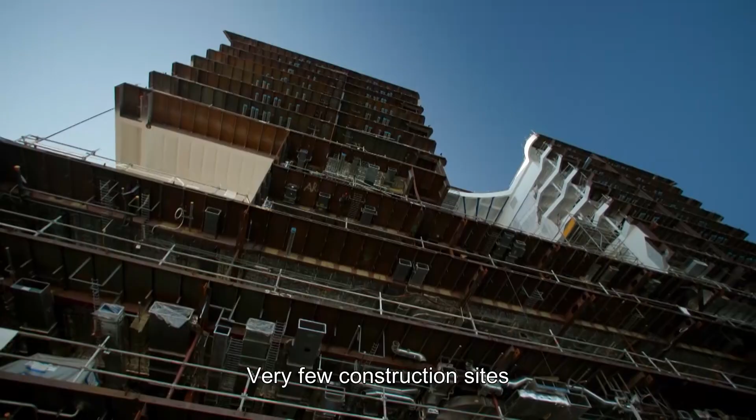The giant vessels that come out of here are the result of incredible human and technological adventures. To bring them to life, the historical expertise of these shipyards are at the service of rigorous organization.

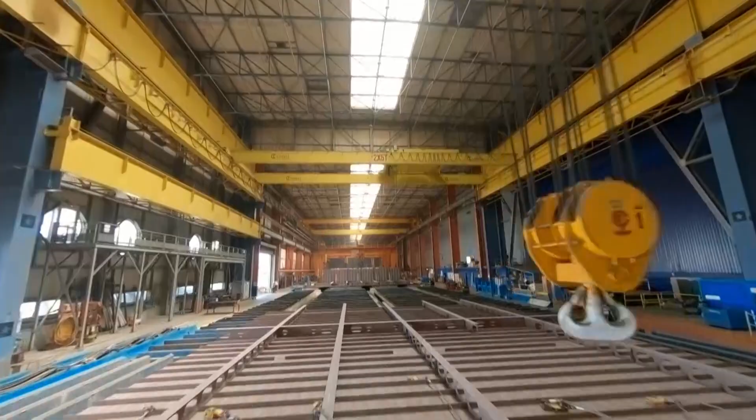Hundreds of thousands of steel parts are cut up every year before being taken in charge by a series of exceptional tools. Oversized workshops where welders and carpenters create complex structures of several tens of feet.

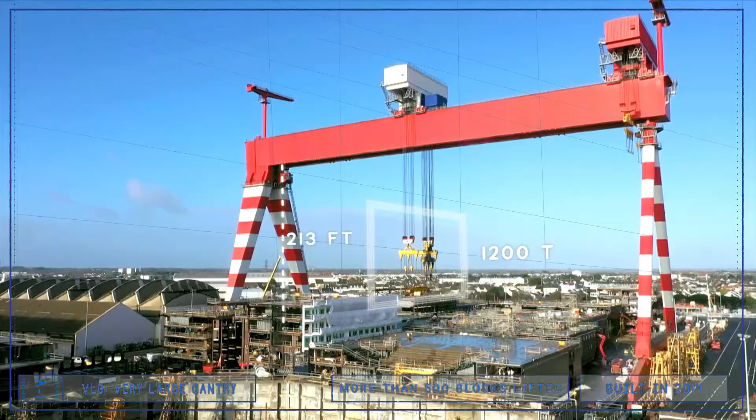On the assembling area, which is over half a mile long, the very large gantry can lift actual buildings weighing over 1,000 tons and assemble them with extreme precision in a monumental dock.

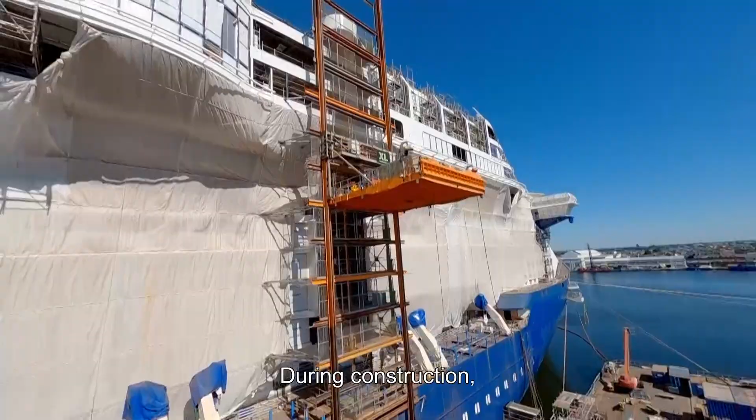On every one of their liners, the Chantiers de l'Atlantique bring together skills from all horizons within an extraordinary site.

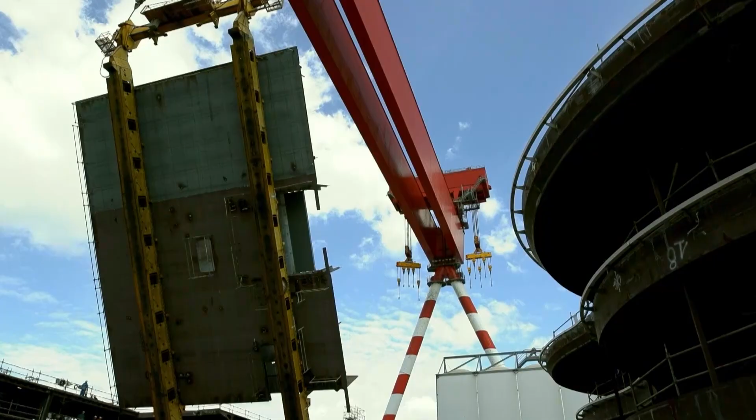How do they design such complex ships? How do they organize their construction in record timing? How do they imagine ever more efficient tools? And how do they carry out several of these colossal work sites at once? Halfway between the land and the sea, thousands of people unite strength for one goal: to perfectly build genuine floating cities.

For 150 years, the liners from Saint Nazaire have made a mark on the history of navigation. Facing the Atlantic Ocean and the mouth of France's longest river, the development of a sizable naval industry imposed itself self-evidently.

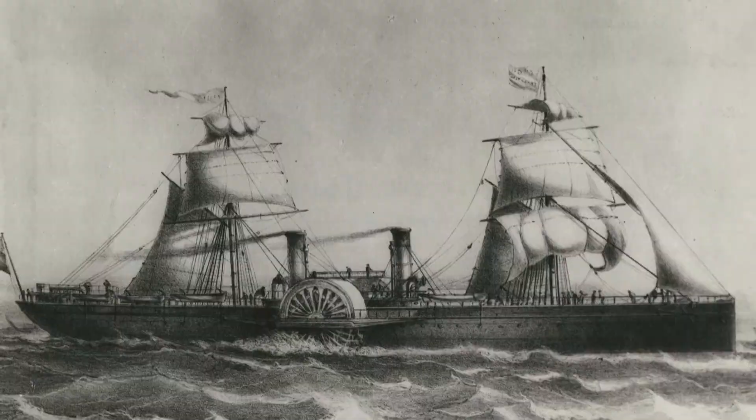As early as 1864, the first French transatlantic steamer came out of these shipyards. In 1935, it was the Normandie, the biggest liner of the time and the start of a long history with gigantism. In 1960, the legendary France saw the day. The productions of those now known as the Chantiers de l'Atlantique continue to fascinate the world.

Today, this is one of the rare cutting-edge industries capable of producing such giants of the sea. No fewer than 980 feet long and 200 feet high. These cruise ships are as massive as they are complex.

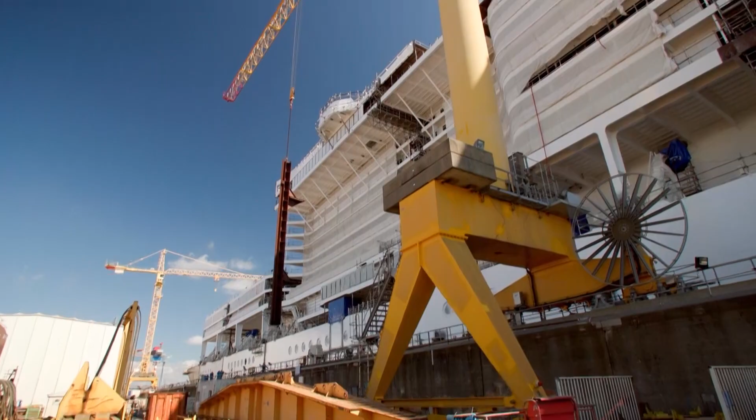To manage such an exploit, all the more impressive infrastructure and tools are scattered over this exceptional site. An oversized manufacturing line spreading over 370 acres is capable of building 3 of the biggest ships in the world simultaneously.

In the main construction area, the structure of the Italian MSC World Europa is being assembled. On the water, on the Quai Penhoët, the Greek celebrity Beyond is having her 2,000 cabins installed. And in Basin C, finishing touches are brought to the gigantic wonder of the seas. In a few months, she will become the biggest cruise ship in the world.

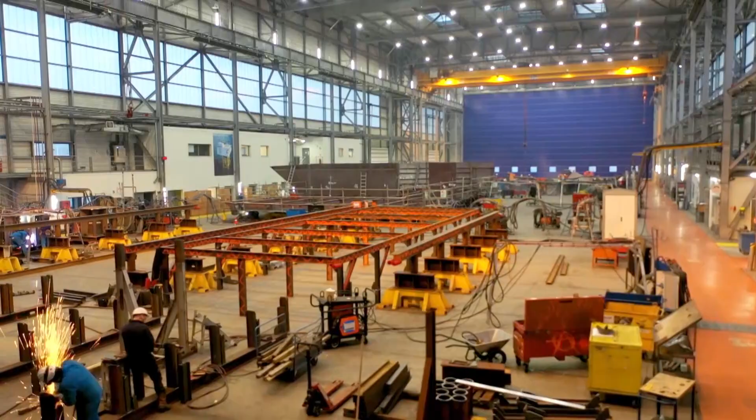Each of these ships is a long-term endeavor. Naval architects plan every tiniest detail. Nothing is left to chance. After over a year of studies comes a journey lasting 24 months through the monumental workshops. More than their conception, it's the way they are built that is important. Genuine expertise, both human and technological.

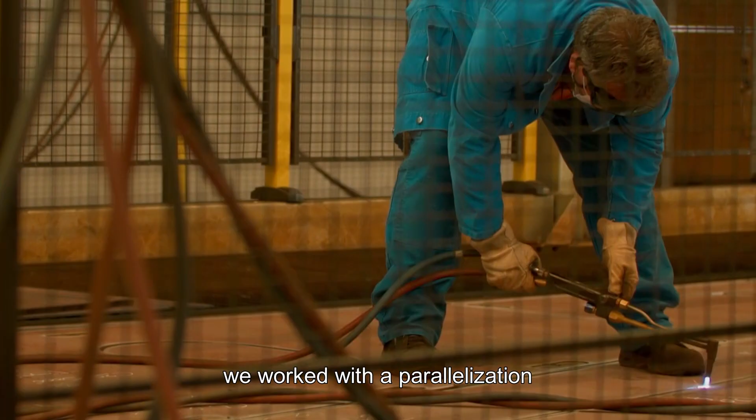Each of the ships conceived here will follow an extremely precise course. Every task is programmed. The elements of the different ships cross each other and are produced at a rigorous and frenzied pace. The real starting point of these extraordinary liners is the sheet metal cutting workshop.

Every year, no fewer than 370 miles of metal are cut up, shaped, and assembled, the equivalent to the distance between Paris and Bordeaux. This huge quantity of steel is first brought and stored as plates in the vast sheet metal sector.

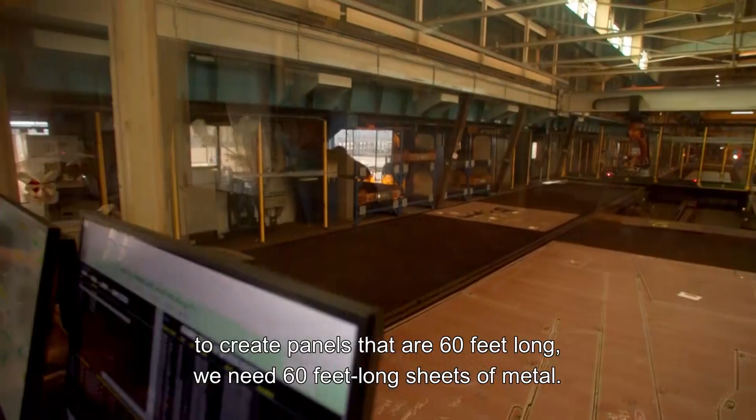Conveyor belts move the sheets up to the cutting tools. No fewer than 400,000 parts of different shapes and sizes are necessary to create the structure of a single ship.

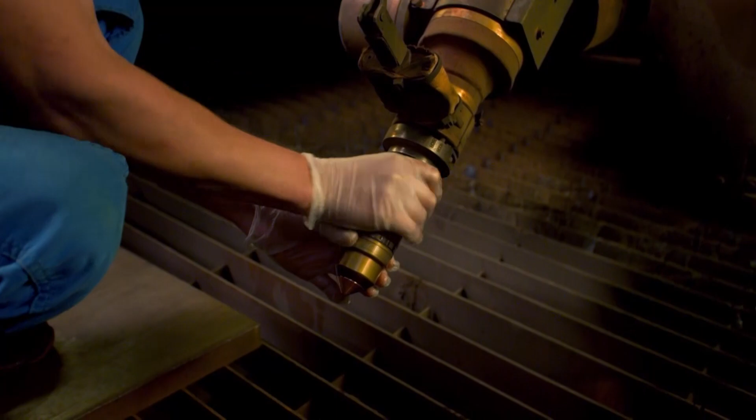The operators check the outlines before they go into the plasma cutting machine. Inside these cutting chambers, the jet of the torch can reach 32,000 degrees Fahrenheit, enough to make steel melt in a flash with a precision down to less than half an inch.

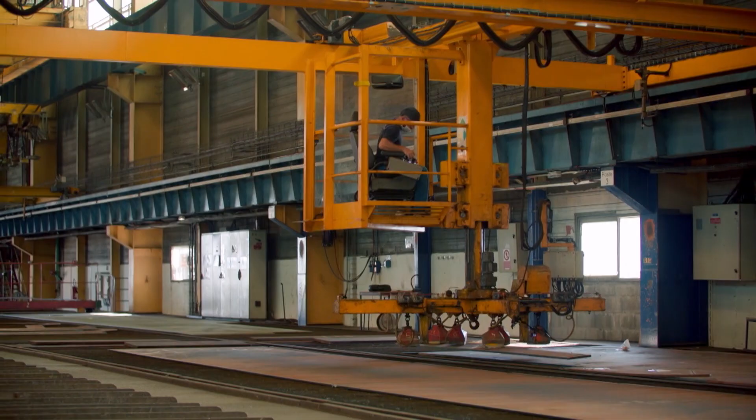No errors allowed. These first cuttings condition the rest of the construction. The different parts must slot in perfectly. Once they've been finely chiseled, each part is then separated from the others by a robot equipped with powerful magnets. They are sorted and arranged into categories before being taken to the first assembling workshops.

The journey continues a few dozen yards away in a huge flat panel workshop, a real manufacturing line where every part is unique. The goal here is to assemble the first elements of construction, panels that will make up the structure of the ships. Their production sets the pace for the rest of the operations.

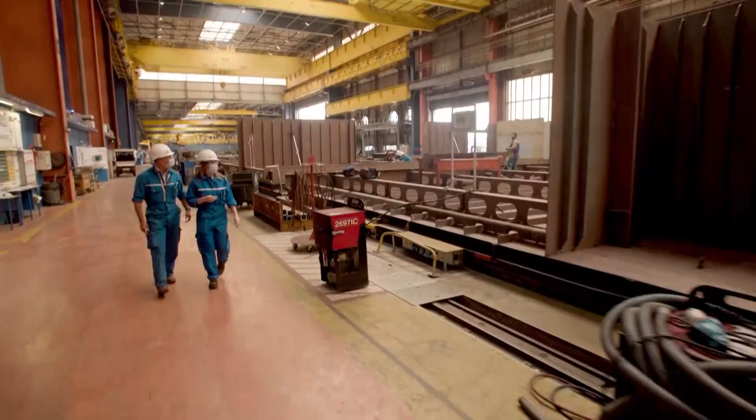Gradually, along the line, more elaborate elements emerge. Three-dimensional parts in which we can make out the first doors and future corridors of the ship.

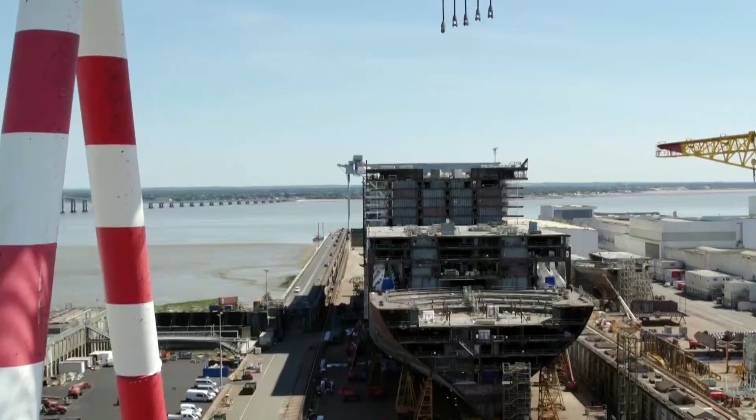Currently, the foundations of the MSC World Europa are being assembled. Her code name is W34. The structure is being elaborated in the construction dock, and the workshops must produce uninterruptedly so as to continue the works. A crucial phase has begun on this manufacturing line, pre-outfitting.

This is when they prepare the installation of the functional elements of the ship to facilitate operations on board later on.

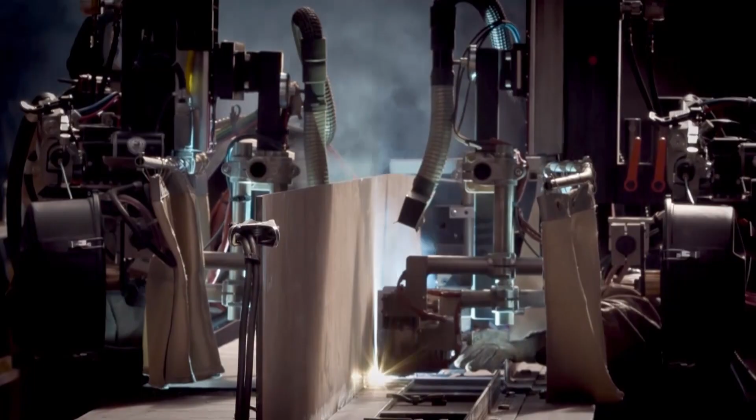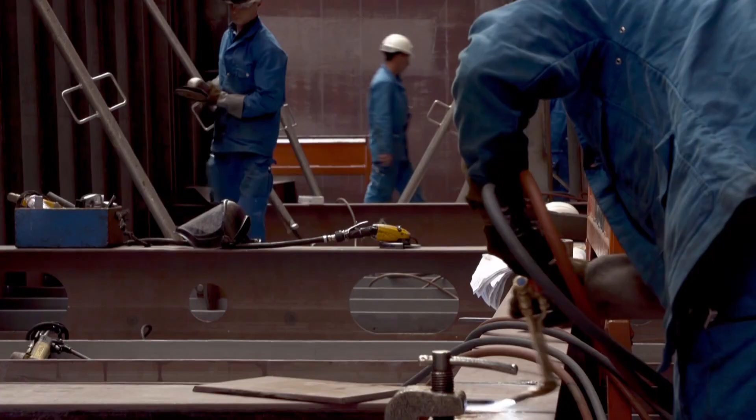The first passages of cables or pipes are pierced now, opening the way to new trades in the manufacturing line. This early introduction of a maximum of elements is absolutely necessary, one of the keys to the efficiency of the shipyard. At this stage, construction teams work on the ground in a controlled environment. The panels are turned over, making it easier to pierce, weld, and generally work on the entire structure.

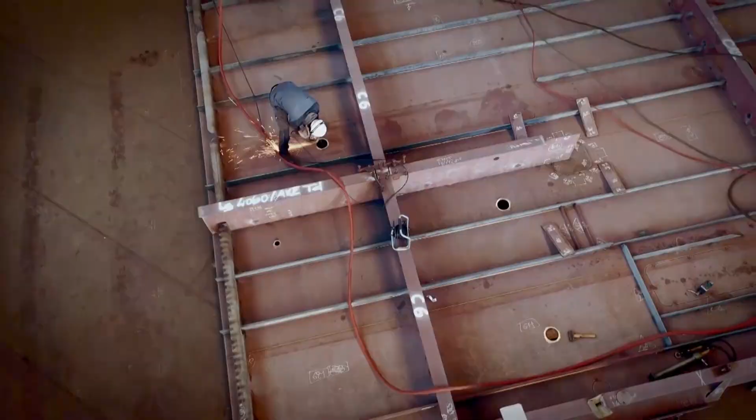When they leave the workshop, each of these panels will weigh 450 tons and will have required 1,500 hours of labor. No fewer than 700 pieces are necessary to create the structure of a single ship.

A few miles away from these steel workshops, an entirely different site is also working at full capacity. The shipyards are equipped with a real factory entirely dedicated to producing cabins, a key element in the construction of cruise liners, which must be mastered from A to Z.

160,000 square yards of production lines, stocks, and workshops. Thanks to this infrastructure, the shipyards can ensure the continuous production of the cabins that will compose their ships. In total, more than 5,000 pieces come out of here every year.

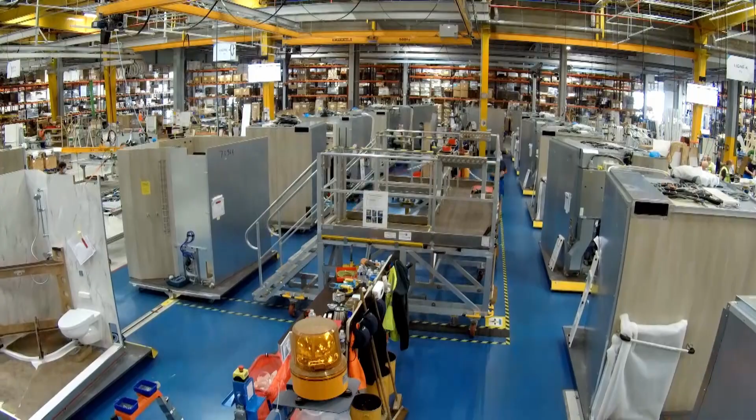For the time being, it's the L-34, the Celebrity Beyond, which is in boarding phase. The structure of the ship was completed 6 months ago, and since then, no fewer than 2,000 cabins must be fitted on board. In the production factory, the pace must not slow down. Everything must go like clockwork to keep up the rhythm.

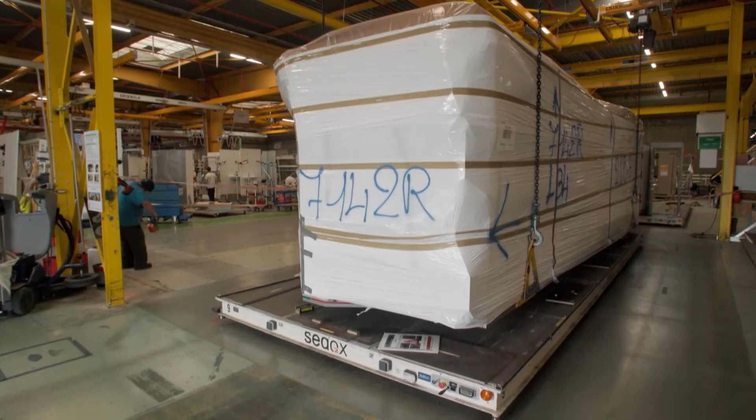The factory only has 6 months to produce the 2,000 to 3,000 cabins of a single ship before moving on to the next one. Back on the main construction site, new parts of the W-34 are constructed, the ship whose structure is only just being erected.

To supply the worksite continuously, particularly sophisticated elements see the day in this gigantic hall, the 180-ton workshop. 120 specialized workers build complex structures designed to form the hull and hold of the ship, parts of several dozen feet hugging precise curves. They must work the sheet metal as finely as possible while avoiding deforming them and maintaining rock-solid sturdiness.

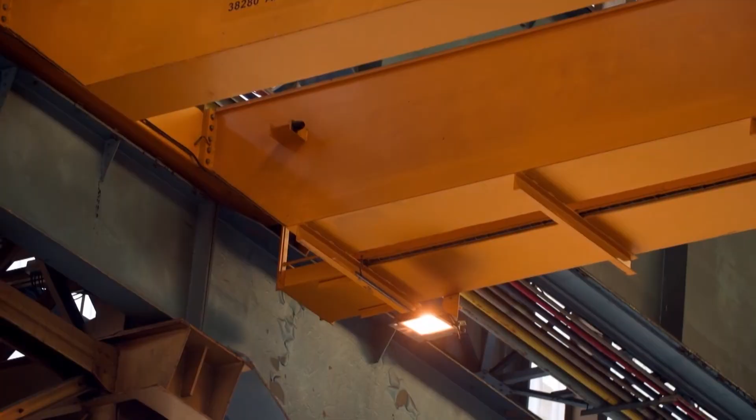To handle these massive elements with the greatest care, 2 lifting decks tower over this vast hall. Their strength gave its name to the workshop. They can hoist parts weighing up to 180 tons. Once in place, the complex panels will be shaped, straightened, and welded perfectly thanks to the skills of the exceptional builders. Each of the elements that leave this workshop requires approximately 10,000 hours of work.

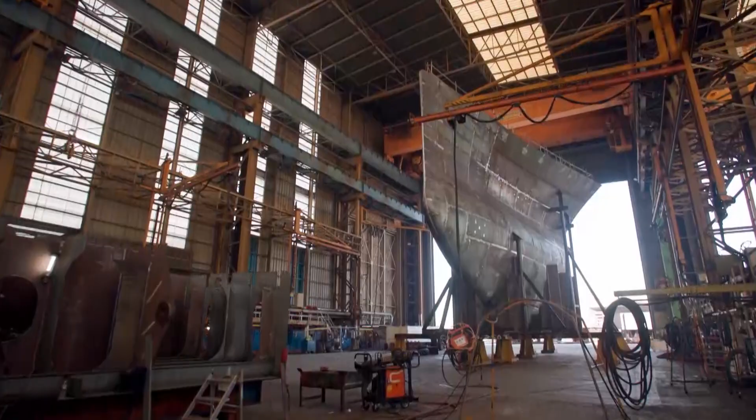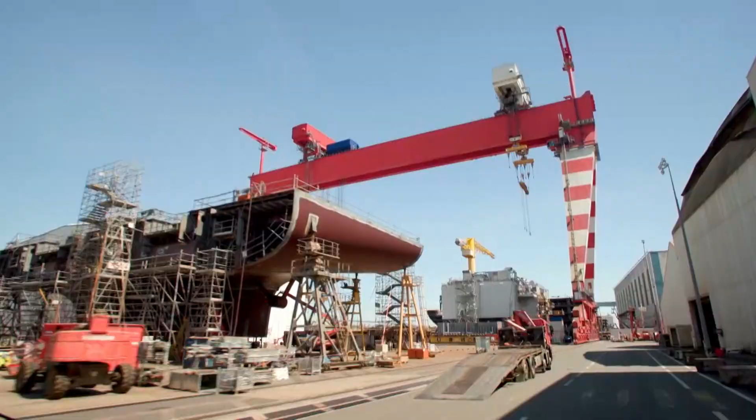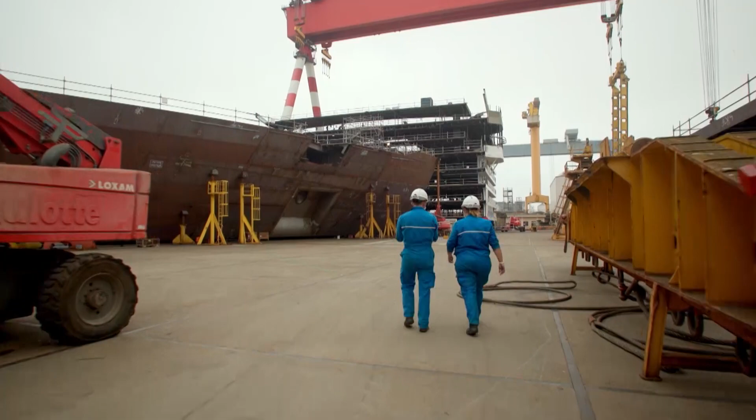These blocks constitute the base unit in the construction of these liners. About 60 of them are needed, of all shapes, to compose an entire ship. Their common point, their size and mass.

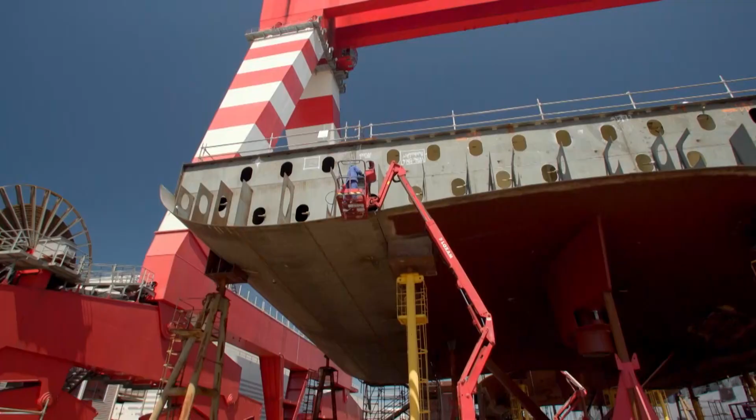Each of these blocks will be moved thanks to the huge gantry crane that towers over the area. But before being integrated to the ship's structure, they will add a maximum of elements while the works are carried out on land.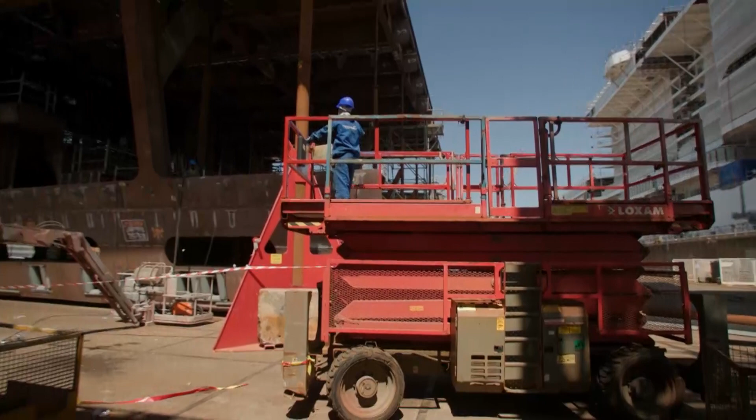The assembly of the W-34 World Europa is halfway completed. Half of the structure is in place in the construction dock that is alongside the pre-assembling area. 35,000 tons of steel that outline the first curves of the ship.

Production and layout of the blocks are in full swing. In turn, they will be grasped by the VLG, the very large gantry. Each one of them must be ready on time, for the clock is ticking. In 3 months' time, the ship's frame must be completed to make way for the next boat.

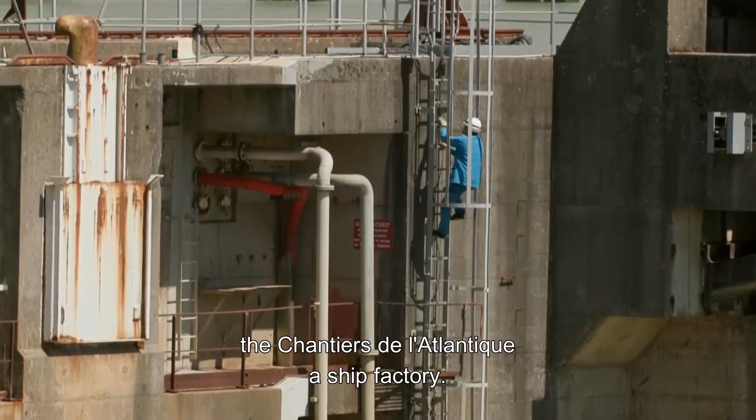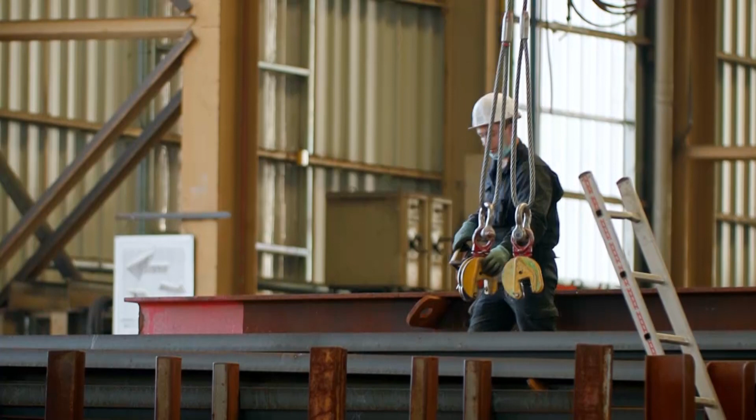In return, this organization requires a thorough preparation and conception of each element. For ultimately, all these blocks must be assembled perfectly. To do so, the most detailed studies possible are crucial.

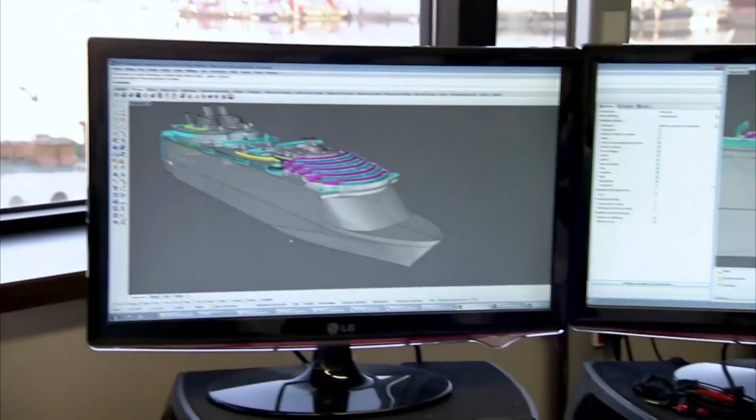To meet the deadlines, construction must start while the design task isn't entirely completed. The studies continue until the last block is positioned.

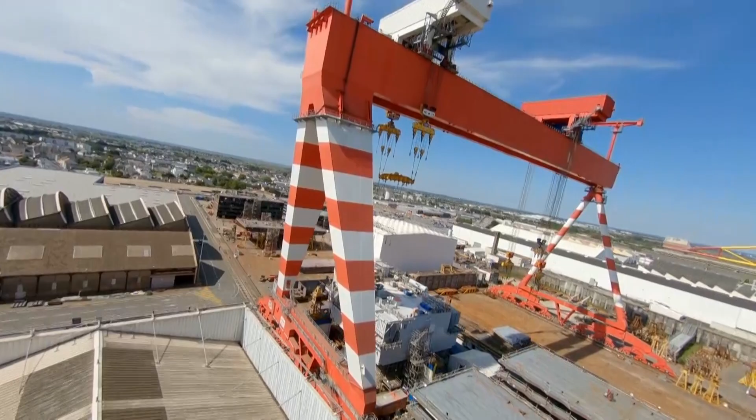The studies make constant progress, while the giants of the seas come to life on the shipyard. On the pre-assembling area, the huge red and white gantry moves along. This is the most powerful one in Europe. Towering over the area at 210 feet high, it can lift elements weighing more than 1,200 tons. It moves along the rails constantly, striding over all the pre-assembling area and the construction slip.

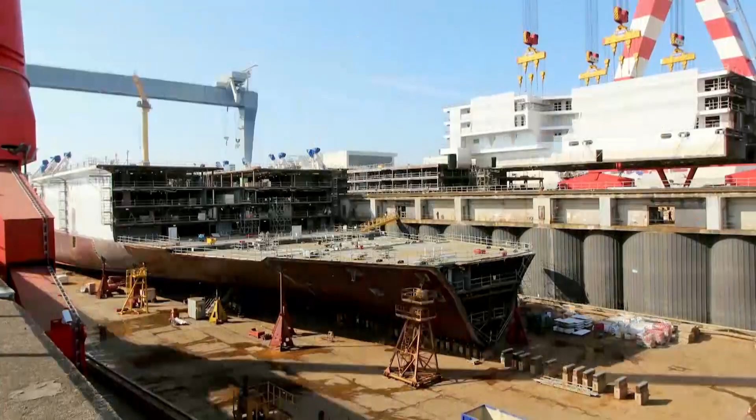It handles blocks one by one on the one side to place them on the other and create the future ship. It sets the tempo for the entire shipyard. This is a real metronome.

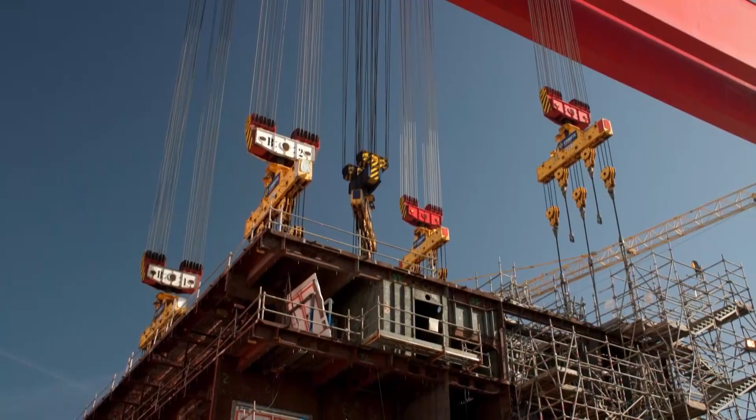Time for Block 525 to come on board. The gantry is positioned above it, and the operators place the lanyards at the top of the structure. In total, 4 lifting hooks are positioned on the corners of the block. A technique that gives the VLG all its power, but that requires impressive precision.

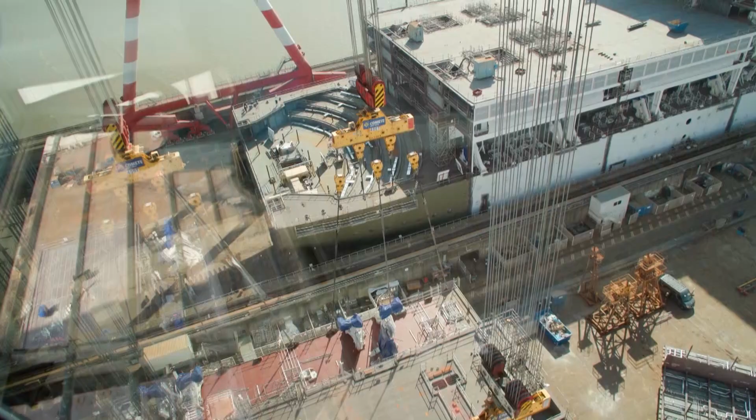Although this operation is carried out every day, it remains a sensitive one. From his cabin, the gantry operator works with extreme precision despite the oversized parts he transports. Once above the ship, his task is far from being completed. The block must come to fit in perfectly with the other elements that are already positioned.

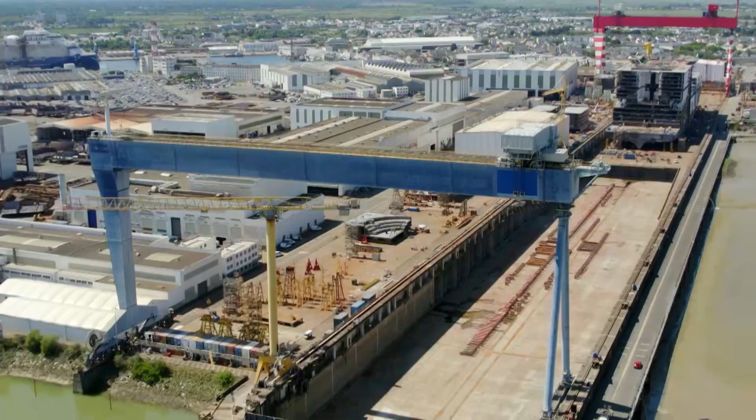Since the beginning of the construction, 30 or so blocks have been assembled. In the end, 58 different blocks will be created, equipped, and assembled to form the W-34. Another 3 months of work in the dock will be necessary to achieve the complete structure. But before continuing the assembly, a particularly sensitive operation must be undertaken.

The rhythm set on all work sites must not slow down. The pace is high, and the pieces of the next ship planned in the schedule are already elaborated in the workshops. Some are even being assembled into blocks. The W-34 will have to give way in the construction area.

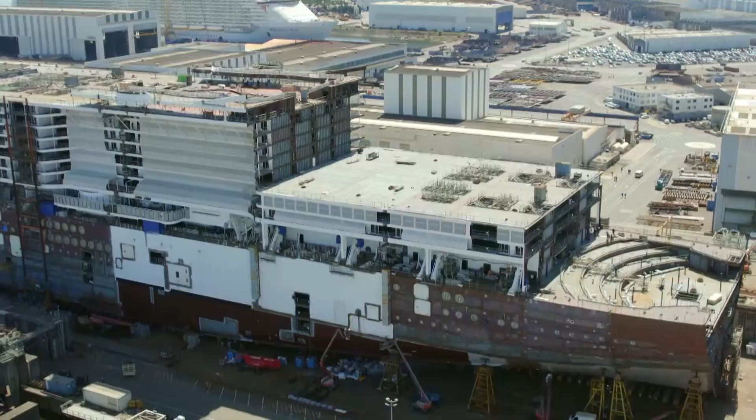This construction area spreads over about 1 mile. It is made up of 2 parts. To the north are the assembly posts in the high dock. This is where the W-34 took shape. On the other side, on the border of the Loire, the second part is called the deep dock. This area of 1,100 feet long by 220 feet wide has a 36-foot elevation gain.

The W-34 will have to move along from the high part towards the low part to leave some room behind her. Managing these construction spaces over time is crucial for the shipyard.

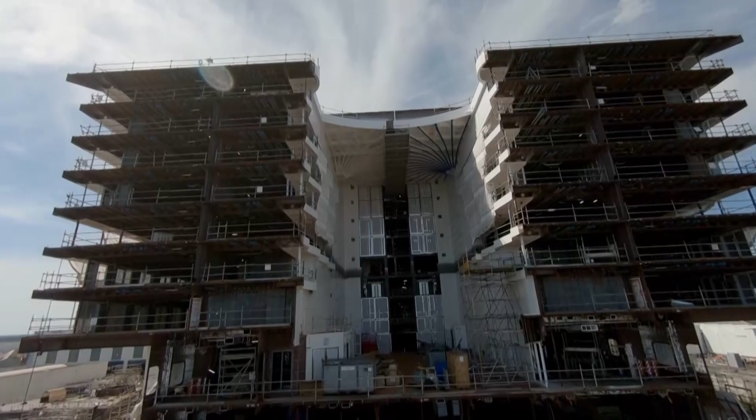At this stage of construction, although the W-34 is incomplete, it can now float. This is in fact the only way of moving such a colossus. To move 35,000 tons of steel, more than 3 times the weight of the Eiffel Tower, buoyancy is of huge help. The entire construction area will be filled with water. The sluice gates open and the Loire fills the area.

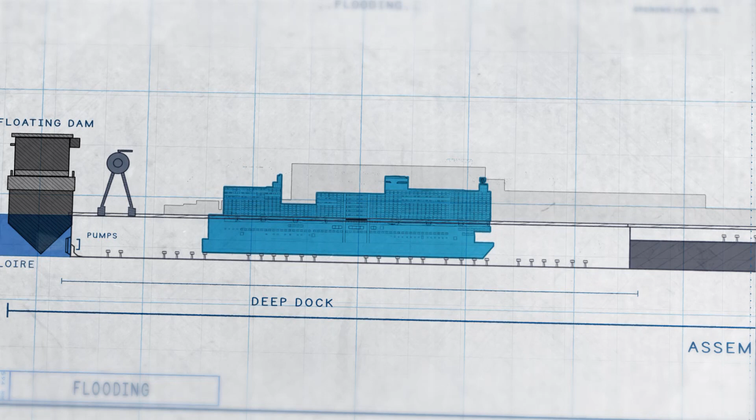The ship is then guided along the docks thanks to a powerful winch. Once in position, pumps empty the dock. The water level goes down and the ship takes its position on new supports. On the other side, the coast is clear for a new construction. Eventually, this deep part can be filled with water to let the W-34 out without disrupting the rest of the shipyard.

Other than making room and getting closer to the Loire before being launched, the W-34 will also be lower down than before. This will allow to build the ship's highest decks. If, in principle, all this handling is simple, carrying it out remains highly complex. There's no room for error here.

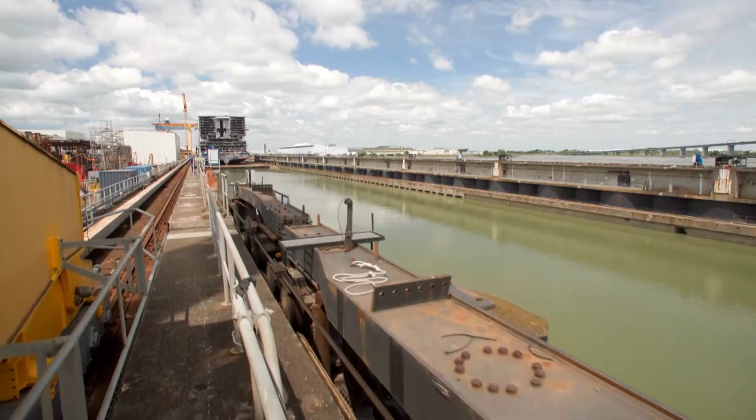Works are at a complete standstill. Everybody has cleared the dock and the water of the Loire starts to seep into the construction dock. After 6 hours of continuous flow in the deep part, the water now reaches the high part. They will have to wait another 10 hours or so for the ship to lift off its supports.

Night is beginning to fall. At 10 p.m., the water touches the hull for the first time, a crucial moment in the ship's construction. The teams must check the hull's water tightness down to the smallest detail.

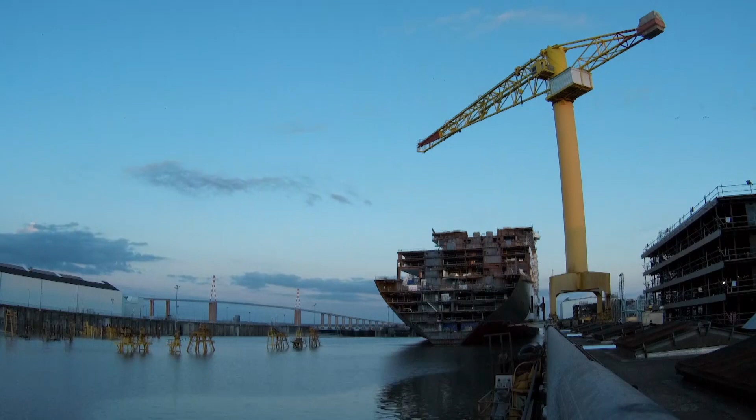Engineers, workmen, and technicians delve into the titanic metal skeleton, looking out for any leaks.

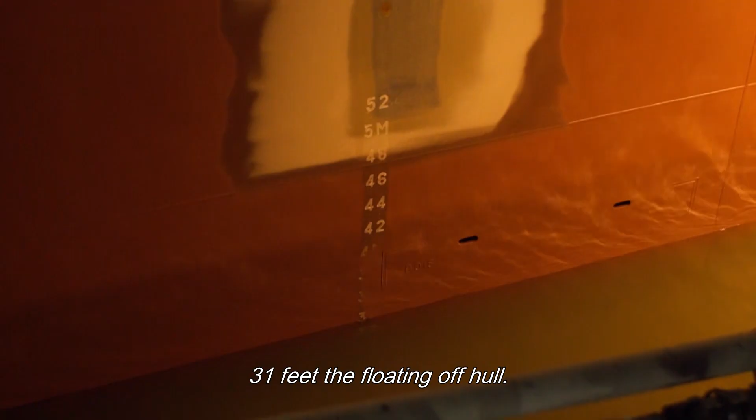Meanwhile, on the outside, they are checking the draft. The ship must go into the water deep enough to ensure its stability and allow for maneuvers.

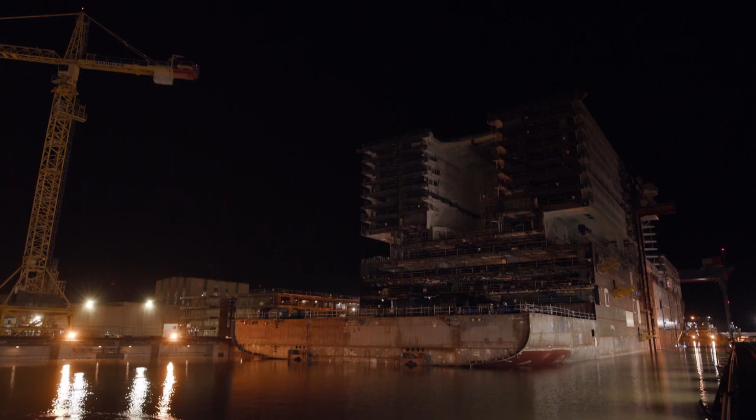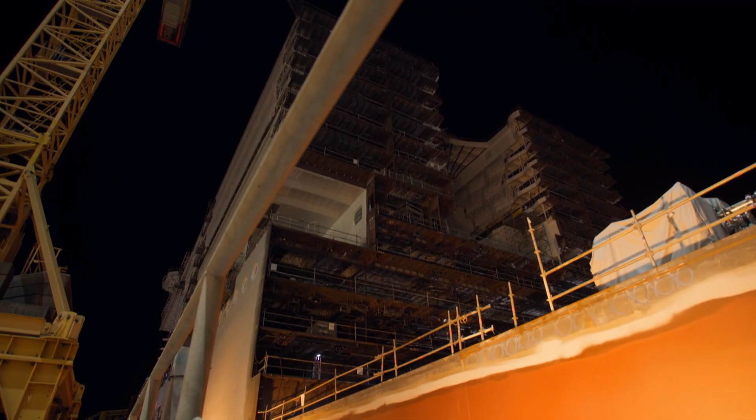The super powerful winch is activated. Everybody holds their breath. In the middle of the night, the steel giant glides silently over a few hundred yards. Ok, on démarre. The team keeps an eye out until she reaches the other end of the dock.

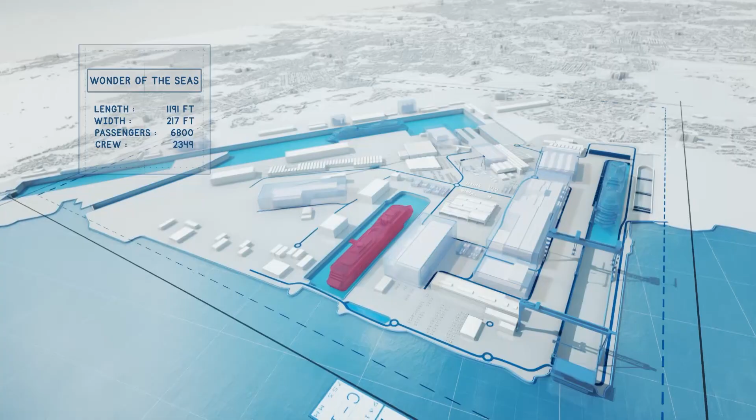The W-34 is in position. In the early hours, the water must be partly emptied for one last maneuver to be performed. While the construction of the W-34 is at a standstill, the last tasks are carried out on the other side of the shipyard. In Basin C, the Wonder of the Seas, also known as C-34, is a few months away from delivery. 1,200 feet long, 220 feet wide, and 230 feet high. Once completed, it will become the biggest ship in the world.

Almost a year ago, this giant left the construction area to join the area dedicated to the outfitting of ships. Since then, teams have been working relentlessly on board. They have been setting up all the ship's equipment, a new phase in the construction of these giants of the seas that calls out to new skills.

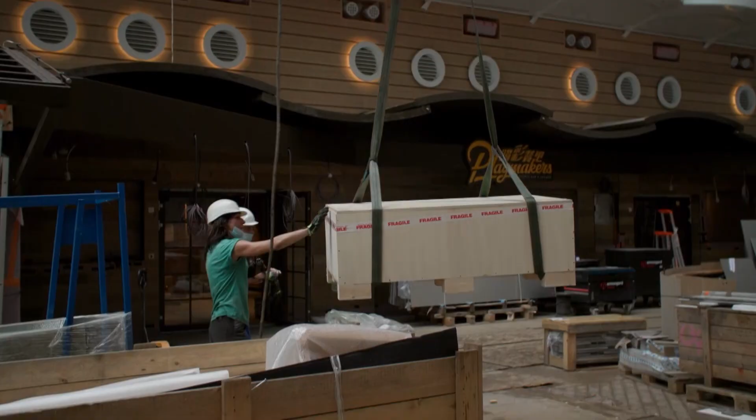The works range from the more functional to the more decorative. This capacity to unite as many trades, to make them work together and in the same direction, is one of the specialties of the Chantiers de l'Atlantique. Once again, preparation and organization are the keys to success.

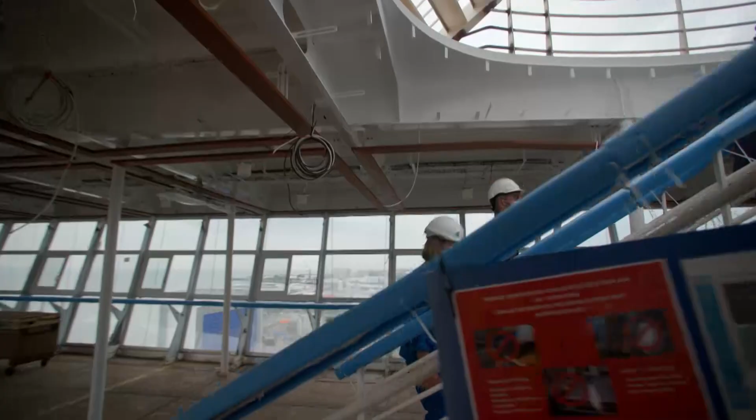Alongside these questions of layout, the first functional elements are going to be tested because a crucial step is coming soon: trials at sea. This will take place in 3 weeks' time, and the ship must be ready to sail for the first time. Back in the construction area, the W-34 hasn't quite finished its movement.

The ship's structure is in position in the deep part. Part of the dock has been emptied, but one last maneuver remains to be undertaken. The 35,000-ton carcass must shift a few yards to change axis.

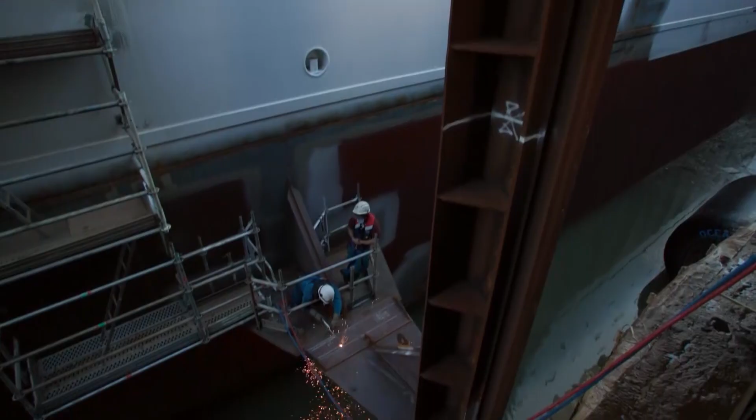To manage to bring the ship closer, the huge struts that helped guide it from one part of the dock to the other must be removed first. These steel parts of tens of tons are carefully cut up before being taken away by the mobile crane.

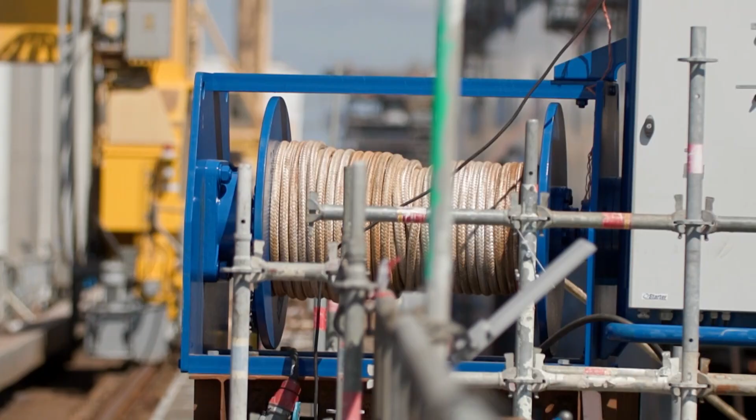At the same time, the future liner has been connected to powerful winches. 8 in total that will allow to move the structure in every direction. They are coordinated to pull or release in turn, thus guiding the ship with a precision down to an inch.

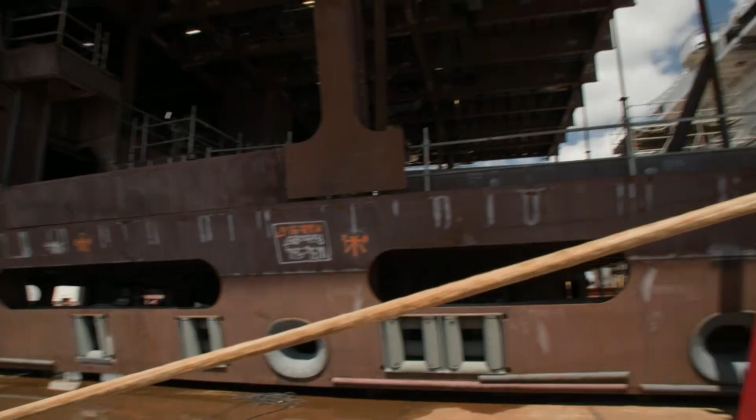The handling cannot just proceed approximately. The ship must be positioned vertically on the supports already positioned at the bottom of the dock. When the water will be emptied, it must stand on them precisely. The slightest shift could make the entire structure topple.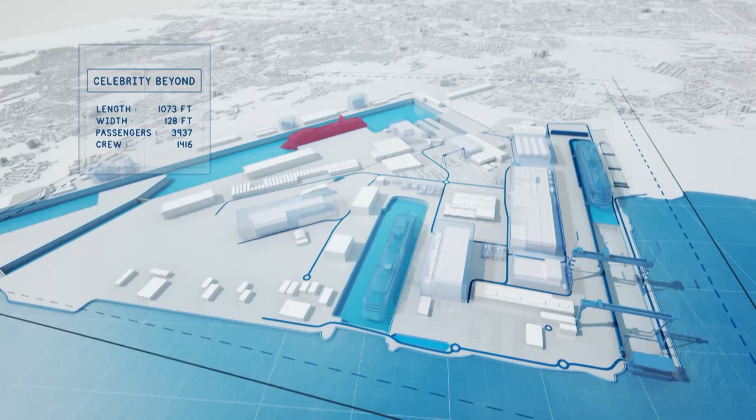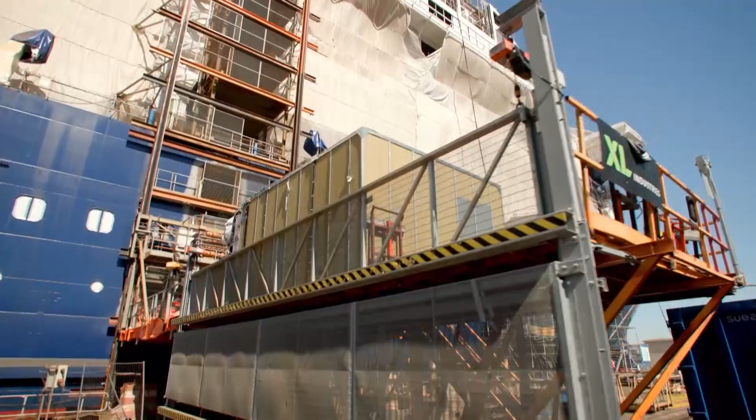This ship will welcome 4,000 passengers and 1,400 crew members. No fewer than 2,000 cabins are produced continuously by the specialized factory and then delivered by trucks daily. Once on the quay, near the ship, each cabin is taken care of by the installation teams. With a giant elevator, they hoist them up along the ship to their final deck.

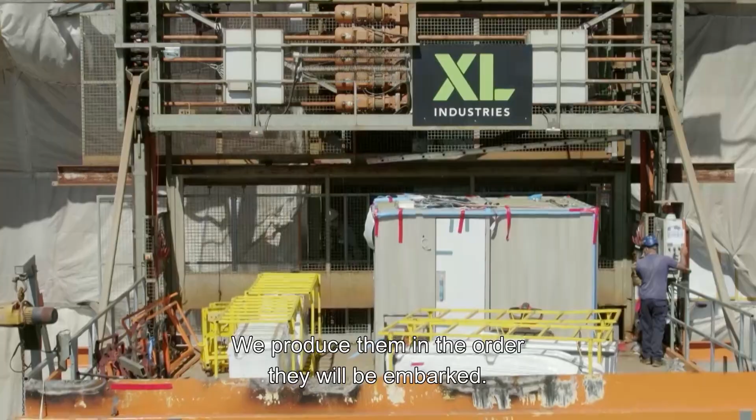The installation takes place in record timing thanks to the highly advanced prefabrication process of each cabin. Once in position, all they need to do is connect the networks, cover the floor, and detach the furniture from the walls. Only a few cabins stand out from these perfectly well-oiled logistics.

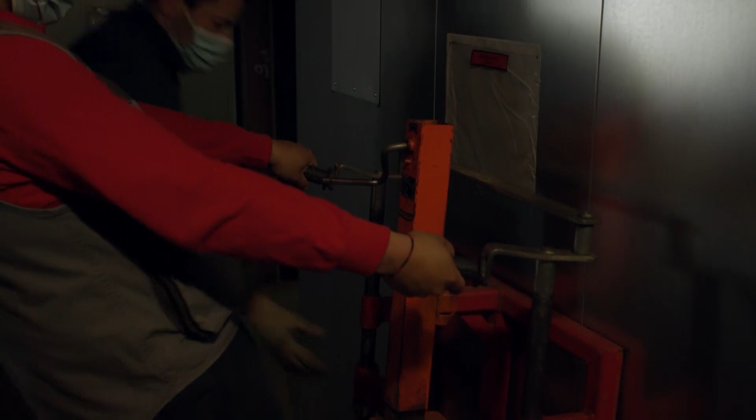Everything has been planned out to the smallest details. If they keep this rhythm up, the teams will need around 6 months to install all the ship's cabins, and 6 more to add the finishing touches of all the elements to this future floating city.

A few hundred yards away, in the gigantic Basin C, it's the big day for the Wonder of the Seas. For over 3 years, thousands of people have been working day and night on the conception, construction, and last touches of this extraordinary ship. With a capacity of around 7,000 passengers, this giant culminates at 230 feet above seawater and spreads out over 1,200 feet. She is about to become the biggest ship in the world.

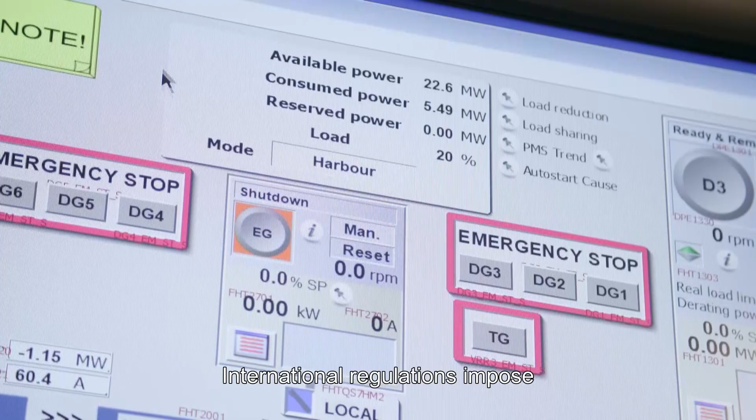Everyone is in position, ready to push the ship's boundaries. The trials will follow on, giving the Titan no rest.

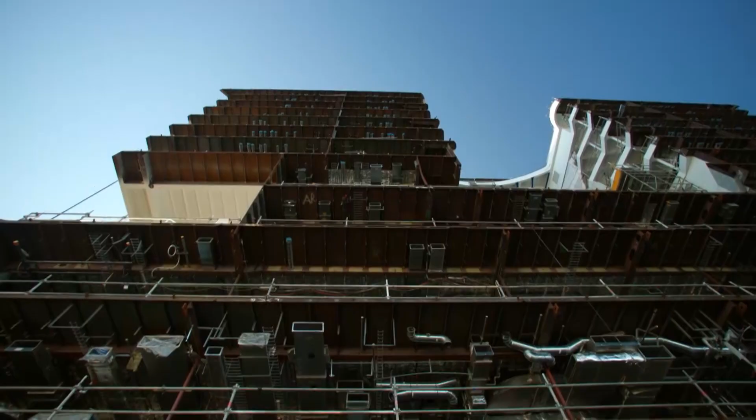The wonder of the seas, the celebrity beyond, and the MSC World Europa all come to make a wonderful mark on the 150 years of history of naval construction, 1.5 centuries during which Saint Nazaire has sailed between gigantism and excellence, launching always more impressive creations.

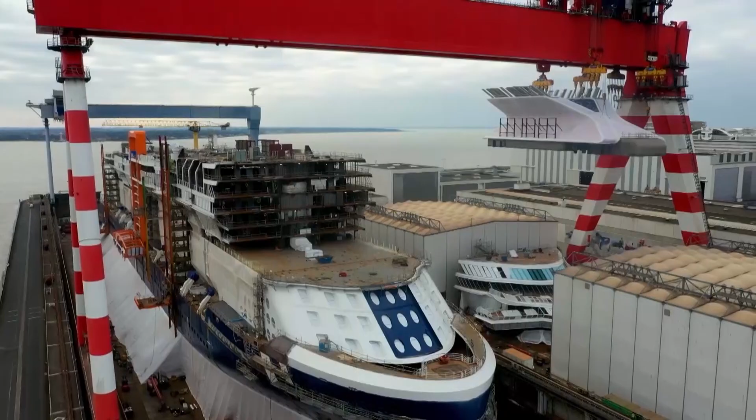Saint Nazaire has become a factory of gigantic prototypes that is capable of building incredible things continuously.